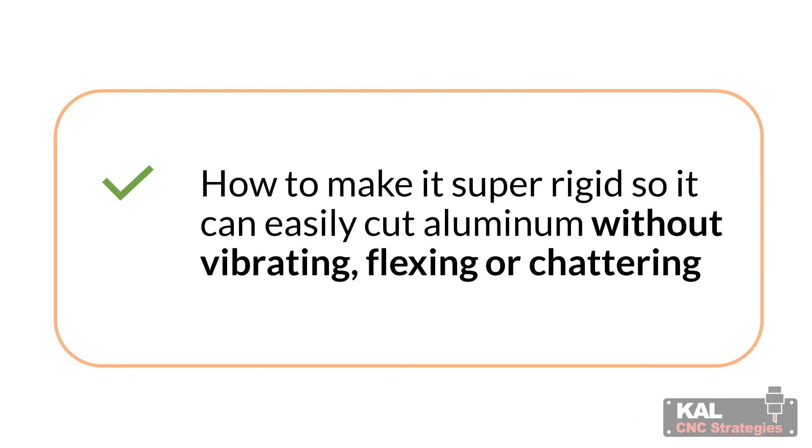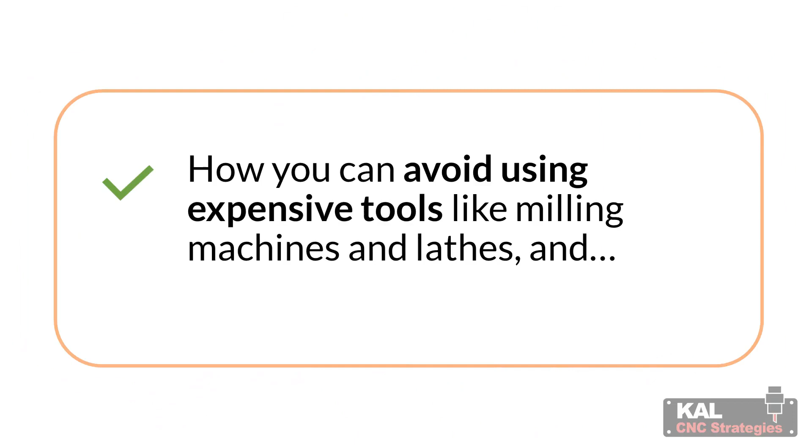In this presentation, you'll discover the simple steps to follow to make your CNC router perform flawlessly, how to make it super rigid so it can easily cut aluminum without vibrating, flexing, or chattering, how to choose the best materials, parts, and components without spending tons of money, how you can avoid using expensive tools like milling machines and lathes, and why it's better to build your own CNC rather than buying cheap pre-built machines or kits.

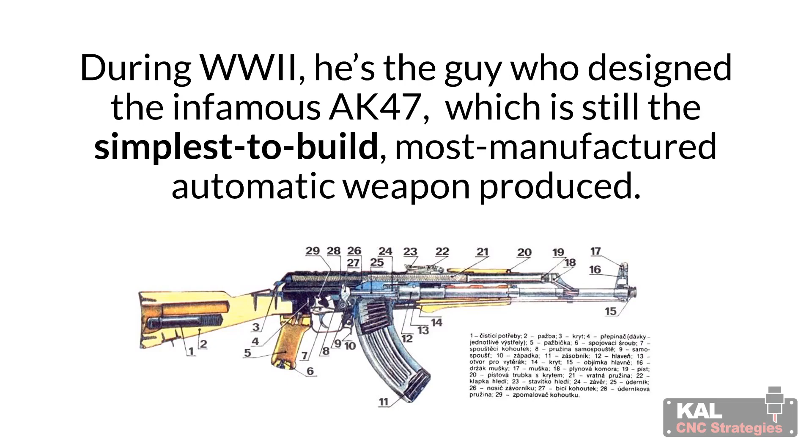Then one day, I stumbled on the perfect strategy. I read about an old Russian weapons designer. His name is Mikhail Kalashnikov. Many of you will know him. During World War II, he's the guy who designed the infamous AK-47, which still is the simplest to build, most manufactured automatic weapon produced. His design was revolutionary.

It had to be super simple to manufacture using unskilled workers and outdated machines that were available to him. Kalashnikov achieved his iconic design by ignoring all the wisdom of the weapons design experts of his day. He saw a problem and solved it without being swayed by what doubters around him thought. It suddenly all clicked to me, and I knew I'd found a way, an approach which would help solve my CNC problem. And so I was inspired to develop the KAL strategy.

The name KAL strategy is a tribute, of course, to what Mikhail Kalashnikov achieved. There's also much more coming up in this presentation to help you with your CNC build, so keep on watching.

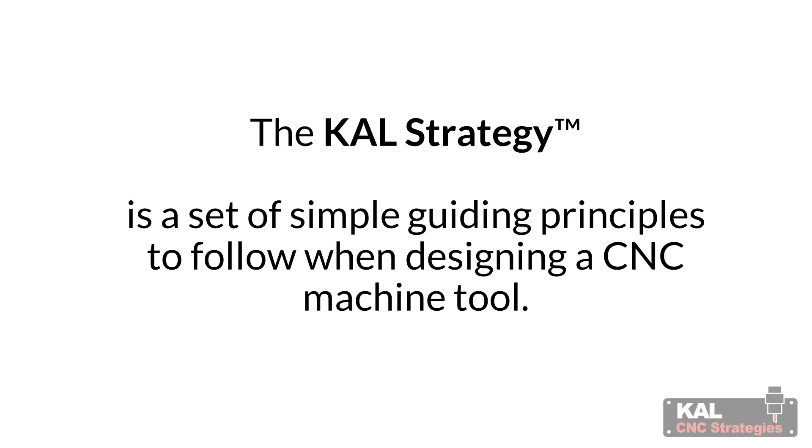The KAL strategy is a set of simple guiding principles to follow when designing a CNC machine tool. The results have been phenomenal because the KAL strategy simplifies the approach to the CNC design and build process a lot. It gives you a clear path to follow. As you can see, I never started out wanting to be an expert at CNC design.

I just wanted to build my own CNC router like many of you out there and make things. But I realized that by following bad advice, I had stupidly thrown away a really good business opportunity. And nothing was going to change for me until I worked out a foolproof, reliable way, a guide that would prevent it all happening again.

You and I have a lot in common as makers and designers. We all face similar day-to-day problems. That is, we just want to get on with producing the things we've designed. The only difference is that I have a simple solution to the CNC design build problem that's insurmountable to so many of us. And that's exactly the reason why you're watching this presentation now.

But first, you're going to need to understand what the real problem with DIY CNCs is. Building your own reliable CNC router doesn't need to be difficult, but it's easy to lose direction. When I started, I had no idea that it could so easily spin out of control and be so difficult to get right. I didn't understand why there were so many badly performing DIY CNC machines existing out there. But now I do. Just look at all the failed machines and horror stories on YouTube and the rest of the internet, and you'll know what I mean.

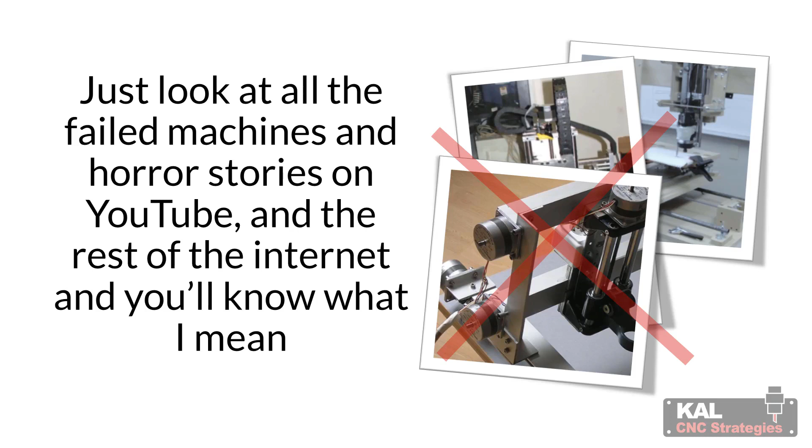You're going to be surprised because the problem is not what you think it is. And I need to make it clear, it's not because you don't have the right building skills. You don't have to be an engineer or a professional machinist to get it done right. The real problem is that we left the tracks.

Let me explain. Back in the 1950s, our factories were changing over from mass-producing weapons for World War II into making consumer goods. The war years were exceptional times. We needed to be really enterprising and efficient just to survive. There was no time to make things overcomplicated and pretty, because lives depended on doing things quickly, simply, and effectively.

But somehow along the way, we started to believe that we couldn't get it done by ourselves. We started to believe all the marketing hype that told us that anything of quality had to be designed by engineers and made in a factory on a production line. All the information you've needed to build a quality CNC on a budget is nowhere to be found. It's not your fault, and here's the reason why.

There are just no in-depth, simple-to-follow, step-by-step guides available that cut through all the BS and the smoke and mirrors. Everybody's trying to sell you overkill, expensive CNC components that you don't really need. They won't tell you that less expensive parts can perform equally well when used correctly. The real trick is to know how to use them properly.

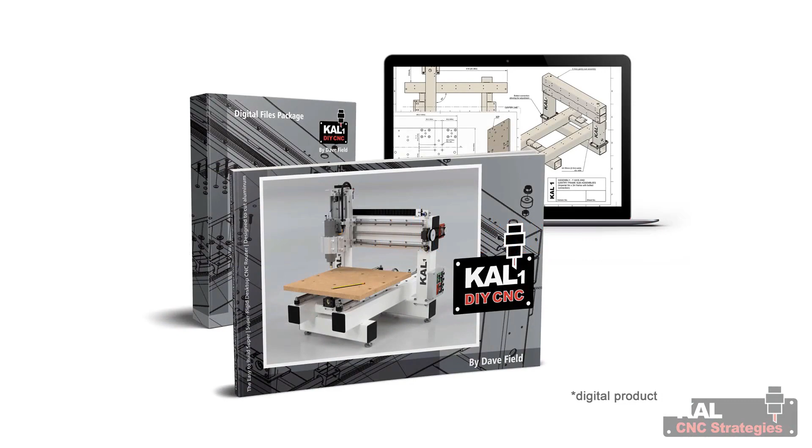Everything I've learned on my long CNC journey has culminated in this easy-to-build professional CNC router design. All the plans and information you'll need to build your own professional quality CNC router are included in the KAL1 CNC package. And here's why the KAL1 CNC router is so unique.

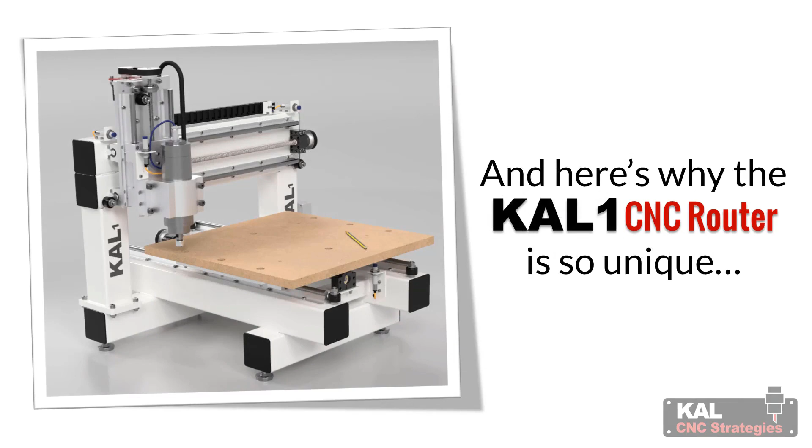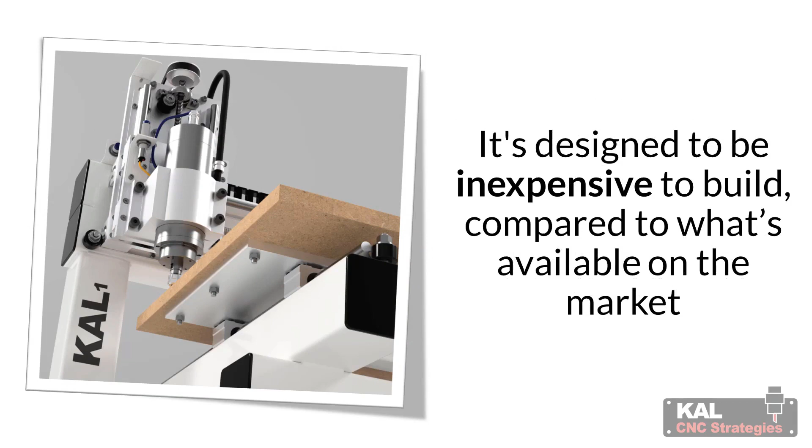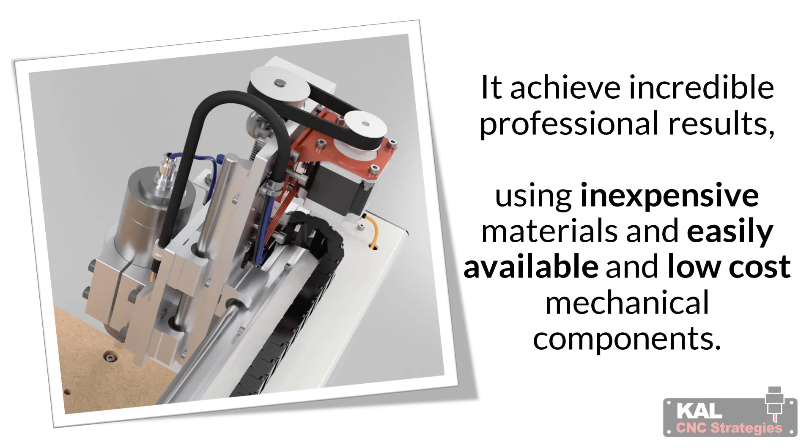It's designed to be super rigid and heavy duty, specifically to cut hard materials like aluminum and brass. It's designed to be inexpensive to build compared to what's available on the market. It incorporates all the economic design principles developed in the KAL strategy. It achieves incredible professional results using inexpensive materials and easily available and low-cost mechanical components.

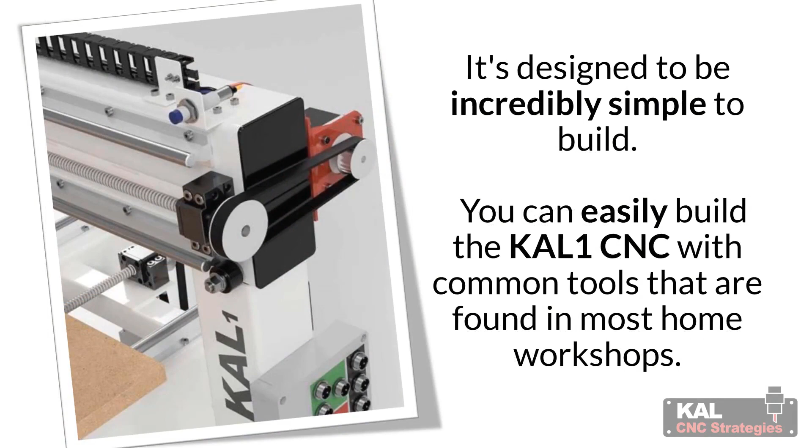It comes as a complete package with plans and in-depth step-by-step instructions. It's complete with all the technical information, drawings, and instructions you'll need to start building your own CNC router. It's designed to be incredibly simple to build. You can easily build the KAL1 CNC with common tools found in most home workshops. No exotic and expensive machine tools like milling machines or lathes are needed.

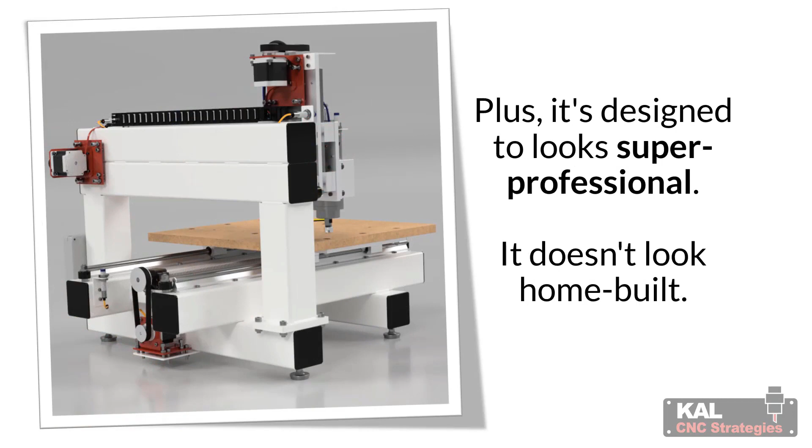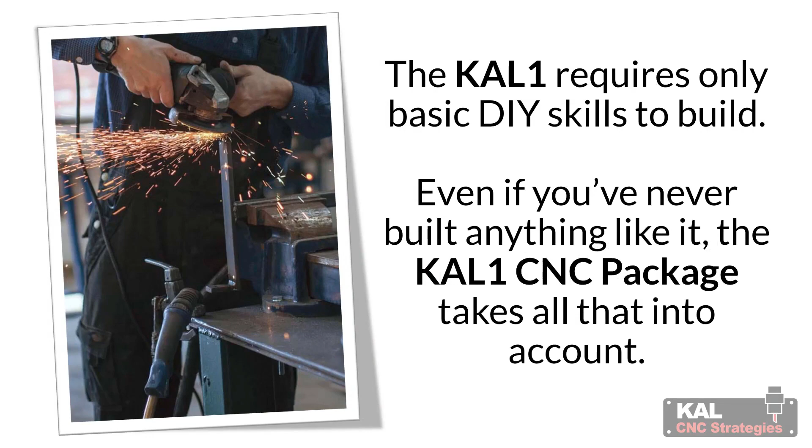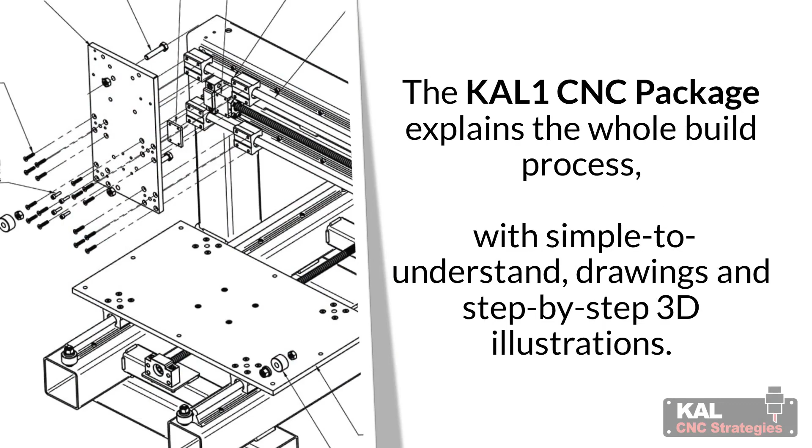Plus, it's designed to look super professional. It doesn't look home-built. The KAL1 requires only basic DIY skills to build. Even if you've never built anything like it, the KAL1 CNC package takes all that into account. It explains the whole build process with simple to understand drawings and step-by-step 3D illustrations. With the easy to follow instructions, you'll be able to build your KAL1 CNC at your own comfortable pace.

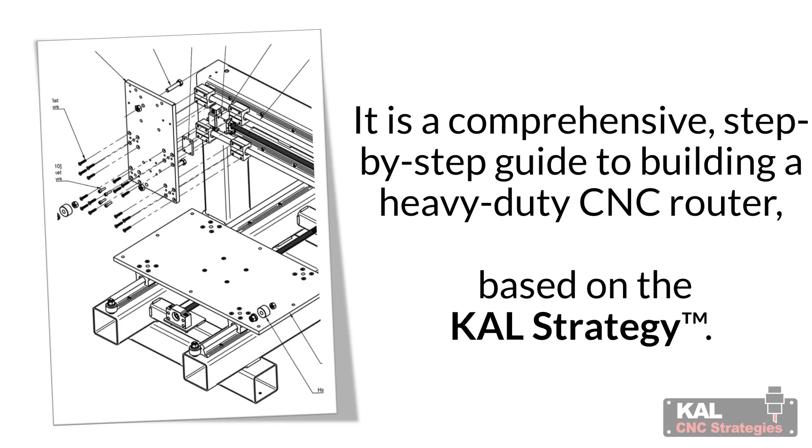But don't get me wrong, the KAL1 is a serious machine tool meant for serious builders, and it'll take dedication and commitment to build. It's been designed for builders and makers who need a professional quality, super rigid CNC router with superior performance. It isn't one of those under-structure thrown together CNC kits. It's a comprehensive step-by-step guide to building a heavy-duty CNC router based on the KAL Strategy.

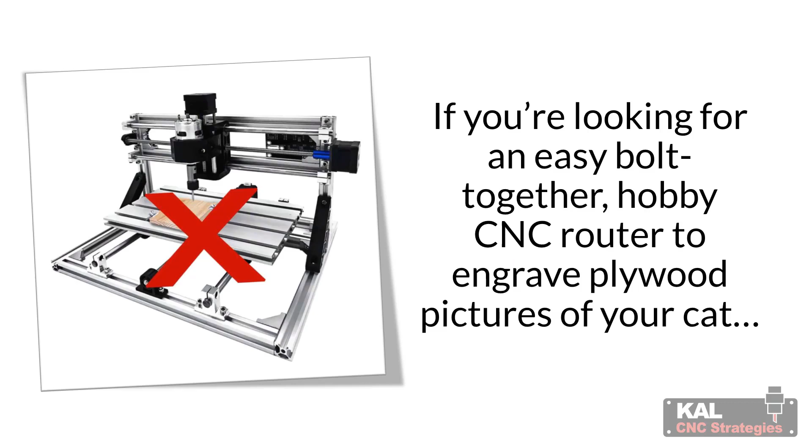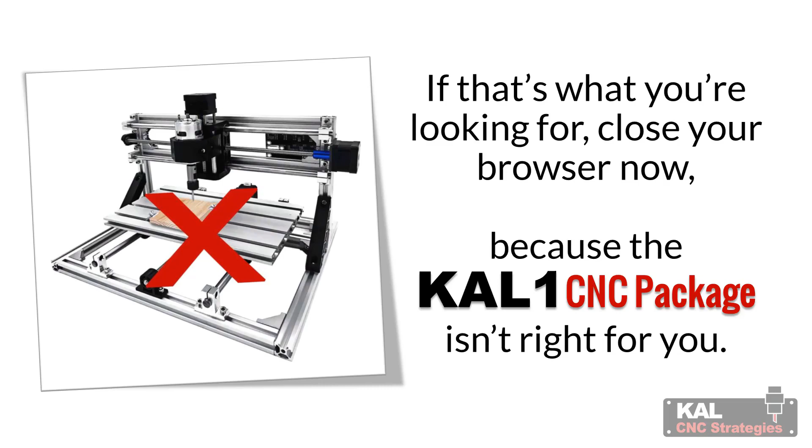So, is the KAL1 CNC package right for you? If you're looking for an easy bolt-together hobby CNC router to engrave plywood pictures of your cat, then KAL1 CNC package is definitely not for you. If that's what you're looking for, close your browser now, because the KAL1 CNC package isn't right for you.

So who is the KAL1 CNC package meant for? It's for those of you who are ready to stop looking for that easy miracle-in-a-box silver bullet solution. It's for those who are ready to put in the real work that's needed to build your own super rigid professional CNC router. It's for those makers who are looking for a serious CNC machine to take their maker skills up a notch.

There are no shortcuts to getting professional quality in a CNC router. There's just no easy push-button solutions. But if you're looking for a pro-quality CNC to serve you well in your shop, and you're prepared to put in the solid work needed to make it happen, then the KAL1 CNC package is as easy as it gets.

Here's what you'll be getting with your KAL1 CNC package. You get the 126-page ebook with 9 in-depth chapters covering the complete KAL1 CNC build from start to finish. It's in easy-to-read PDF format, so you can read it on your computer, tablet, or phone anytime, or print out the drawings whenever you need to.

The ebook contains all the easy-to-follow drawings, instructions, and files you'll need to quickly and successfully complete your KAL1 CNC build. Here's what's inside. Chapter 1, the design build approach. Here we go over all the design choices we made when designing the KAL1 CNC. We go into detail about the different CNC frame configurations. We also explain the different linear motion and drive systems. And we explain the CNC control box and the CNC control software you'll be using.

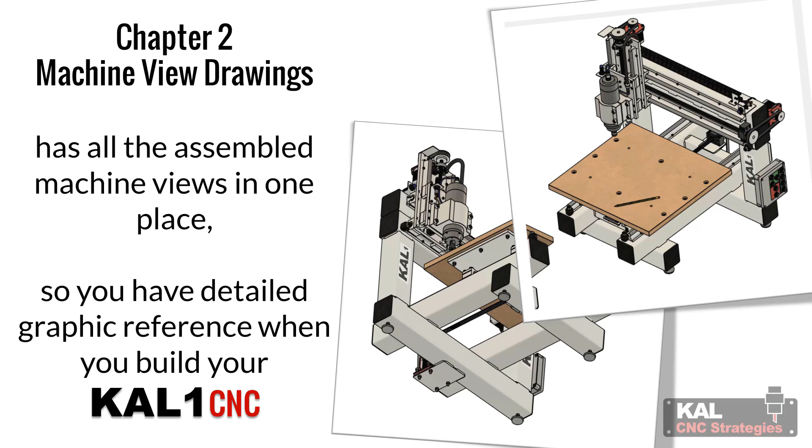Chapter 2, the machine view drawings. It has all the assembled machine views in one place, so you'll have a detailed graphic reference when you build your KAL1 CNC. Chapter 3, the fabrication drawings.

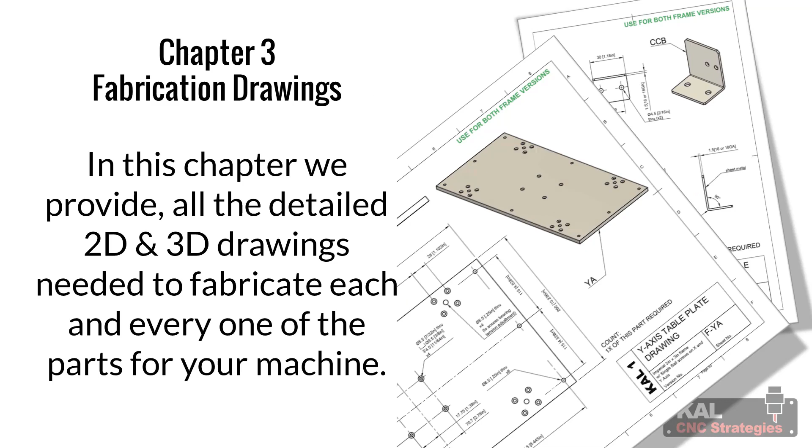In this chapter, we provide all the detailed 2D and 3D drawings you'll need to fabricate each and every one of the parts for your CNC machine. Every dimension, hole, and weld is clearly called out in inches and in millimeters on each of the drawings, together with full, easy-to-follow notes and instructions.

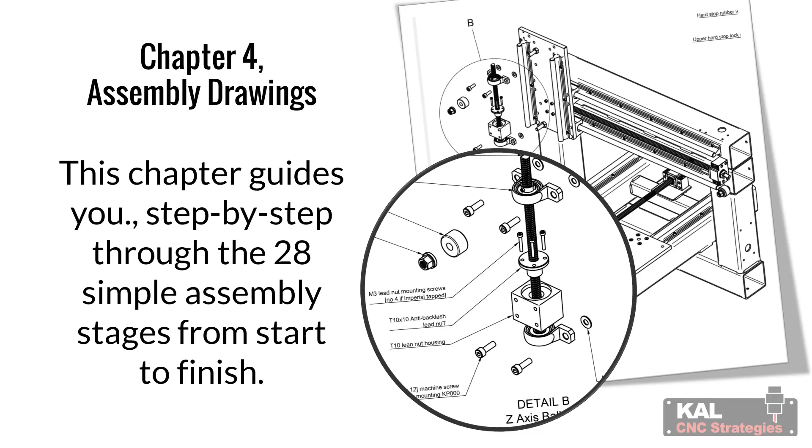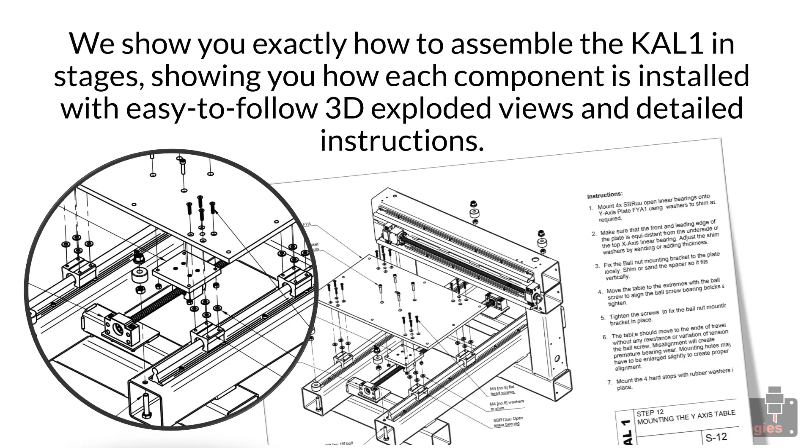Chapter 4, the assembly drawings. This chapter guides you step by step through the 28 simple assembly stages from start to finish. We show you exactly how to assemble the KAL1 in stages, showing you how each component is installed with easy-to-follow 3D exploded views and detailed instructions. You'll be taken through the assembly process in 28 easy-to-follow step-by-step stages.

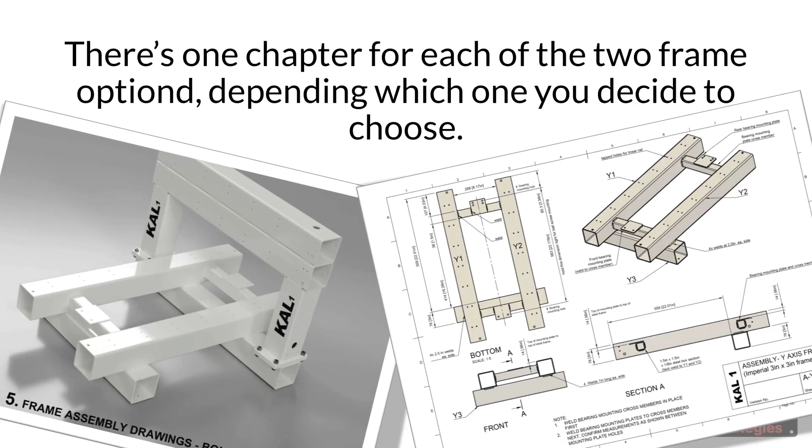Chapter 5 and 6, the frame assembly drawings. You'll need these chapters when building the machine frame. They contain all the drawings to accurately assemble your CNC steel frame. There's one chapter for each of the 2 frame options, depending which one you decide to choose.

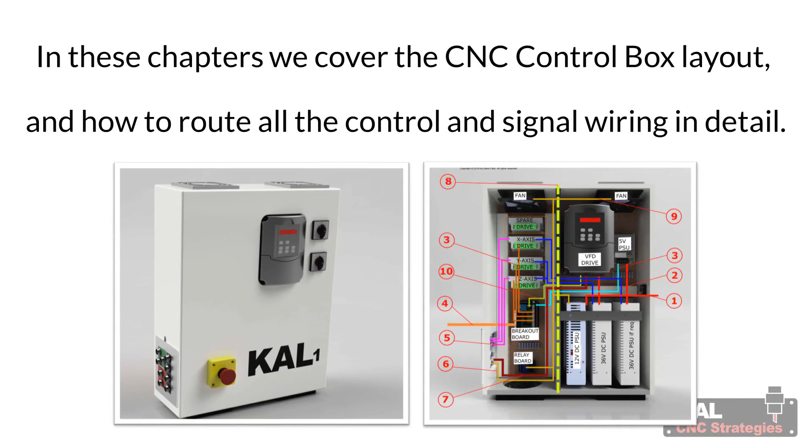Chapter 7 to 9, here we take you through the final build stages of your CNC router. In these chapters, we cover the CNC control box layout and how to route all the controls and signal wiring in detail. Plus, you also get the structural analysis study showing how well the steel frame will perform under the design cutting loads. And you also get the electronic DXF files of all the CNC mounting plates, so you can print full-size cutting and drilling templates.

Or, if you want, cut them on a friend's CNC router. And for that professional final touch, we include the digital graphics files for the official KAL1 logo.

So you can see, with a KAL1 CNC package, you get everything you need to start building your KAL1 CNC router. And you can start just minutes after you purchase the download package. The best part of the KAL1 CNC package is how quickly it is to get started. No design and testing needed. And the KAL1 CNC router is really simple to build. No machining or anything like that.

Right now, you're probably curious how much the KAL1 CNC package is. You may be thinking that this package could cost you over $500. Well, the good news is that's not the case.

I'm going to reveal that to you in just a few moments. But first, consider this. When you buy the KAL1 CNC package today, you'll be avoiding all those weeks and months of wasted time researching, drawing up, and testing your own CNC design, wondering if it'll work as you expected. With the package, you'll be able to get started on your CNC build without any delays. There'll be absolutely no unknowns, and the path ahead for your CNC build will be clearly mapped out with no curveballs or surprises, because all the engineering heavy lifting has already been done for you. You'll be able to proceed through your CNC build with complete confidence.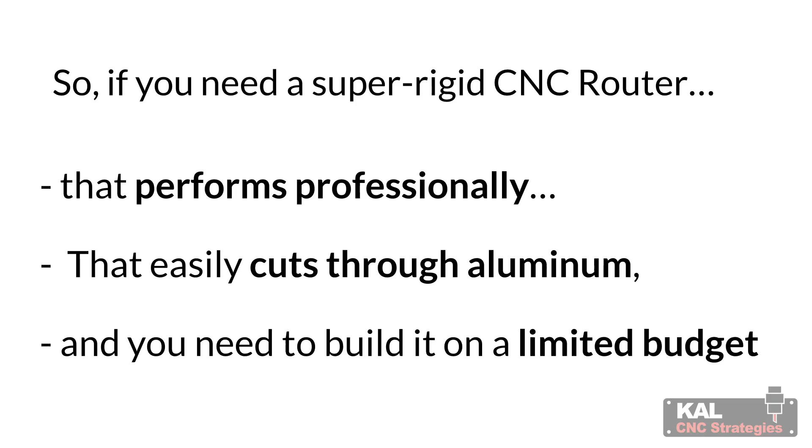So if you need a rigid CNC router that performs professionally, that easily cuts through aluminum, and you need to build it on a limited budget, and you want complete step-by-step drawings and instructions in a completely professionally designed package, then the KAL1 CNC package is right for you.

When I first started putting together this package, I was thinking that a fair retail price is $297. But I've changed my mind now, and I'll tell you about it in just a moment.

But first, at some point, you're going to discover that to complete your CNC router build, you're going to need to have an accurate and complete bill of materials, or BOM, as it's known. In the BOM, you'll need to compile a complete list of all the parts with quantities. There's really no way around it, because you'll be completely lost without one.

Now, the good news is that you won't have to do all that work. That's because I'll be giving you, as a free bonus, the complete detailed BOM we've put together for the KAL1. The BOM lists all the materials, parts, and components you'll need with the quantities, purchase links, and pricing. You'll be able to order the products online by simply clicking or pasting the part number into your browser. The KAL1 BOM is really valuable and is worth at least $50. It'll end up saving you days and days of work. Including the BOM as a bonus brings the total value of the KAL1 CNC package to $347.

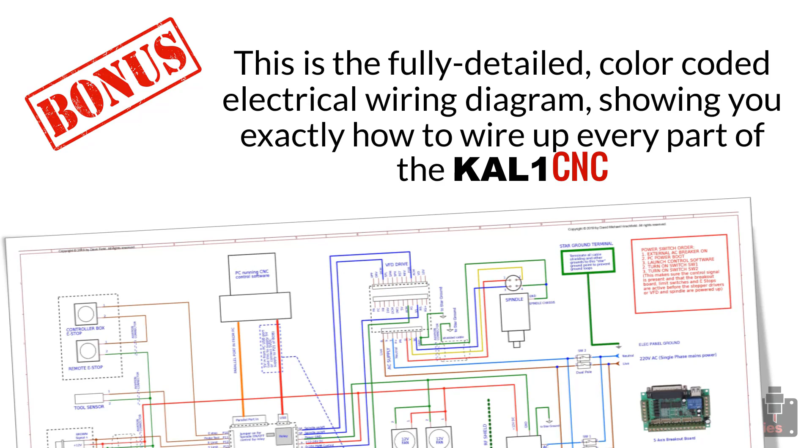When you purchase the package, I'm including the complete KAL1 CNC wiring diagram free as a bonus. This is the fully detailed, color-coded electrical wiring diagram showing you exactly how to wire up every part of the KAL1 CNC. It explains exactly how to wire the limit switches, the stepper motors, the spindle control, and all the internal wiring of the CNC control box, which is the computer control brain of the CNC router. You won't find this wiring diagram anywhere, not on the internet or in any library.

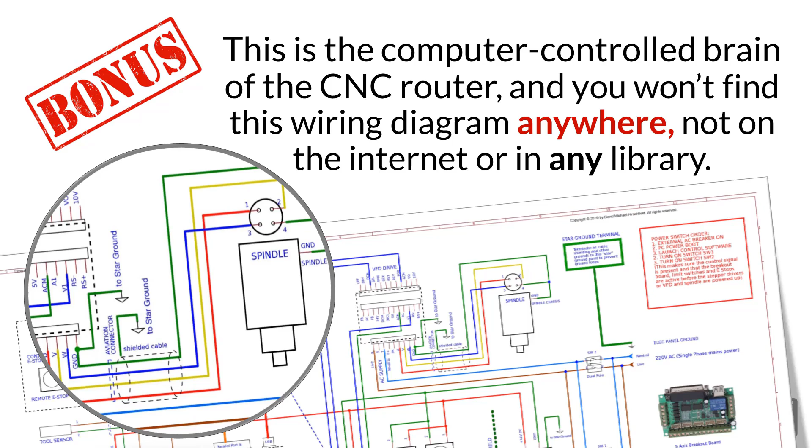The KAL1 CNC wiring diagram took me weeks of design, trial and error, and testing to get right. It makes the wiring stage so straightforward that I could easily sell it for $50 as a standalone product, but instead I'm including it in your package today as a completely free bonus. It'll eliminate all your wiring guesswork and testing headaches and allow you to speed through the final stages of getting your CNC machine cutting.

With the complete KAL1 CNC package plus bonuses, you'll be in easy reach of having your own super rigid, pro quality CNC router. You'll be joining the thousands of makers and builders who are succeeding using CNC routers in their shops every day to produce incredible products. They're producing things like drones, robotic parts, electric guitars, auto and bike parts, signage, and thousands of other things. With your CNC router, you'll be able to easily go from rough concept sketches to accurately machined aluminum and brass parts in just minutes.

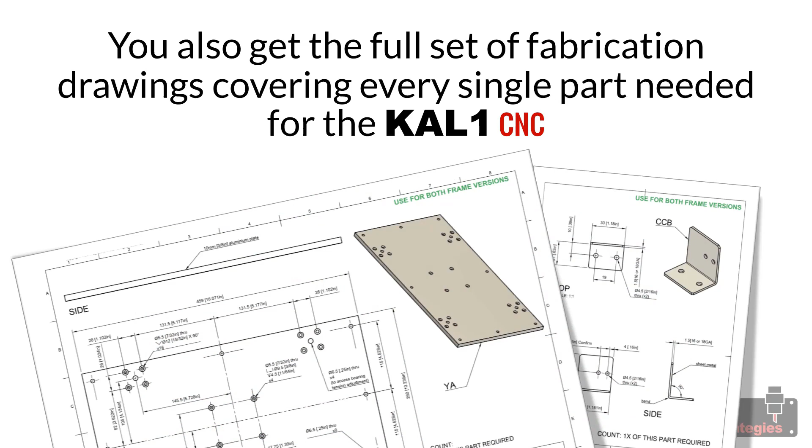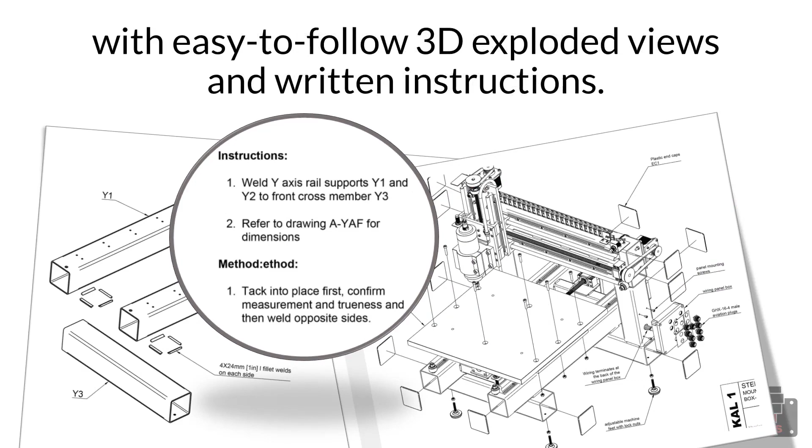So here's what you'll be receiving today. You'll get the complete KAL1 CNC package, which includes all the chapters we covered earlier. You get the detailed KAL1 BOM, listing all the materials, parts, fasteners, and electric parts you'll need, plus a spreadsheet file of the BOM so you can revise it if you want. You also get the full set of fabrication drawings covering every single part needed for the KAL1 CNC, plus all the step-by-step assembly drawings with easy-to-follow 3D exploded views and written instructions. And then there's instructions on how to hide the wiring in the frame, so you end up with a really professional-looking machine without a tangle of wires.

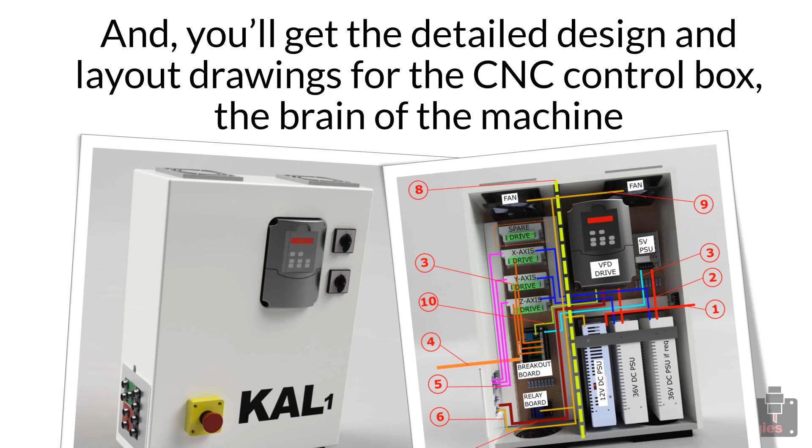You'll get the detailed design and layout drawings for the CNC control box, the brain of the machine. We show you in detail how to lay out the power supplies, control boards, and how to manage the wiring so everything is stable and you avoid any electrical interference in the signal wiring. Plus, included as a bonus is the complete KAL1 CNC wiring diagram, so there's no wiring guesswork at all. It shows you exactly how to wire and ground every electric and electronic component correctly and avoid any problematic ground loop problems. Also, you get the digital CAD files for all the mounting plates, so you can print out full-scale drilling templates, or even cut and drill those parts on the CNC router if you choose.

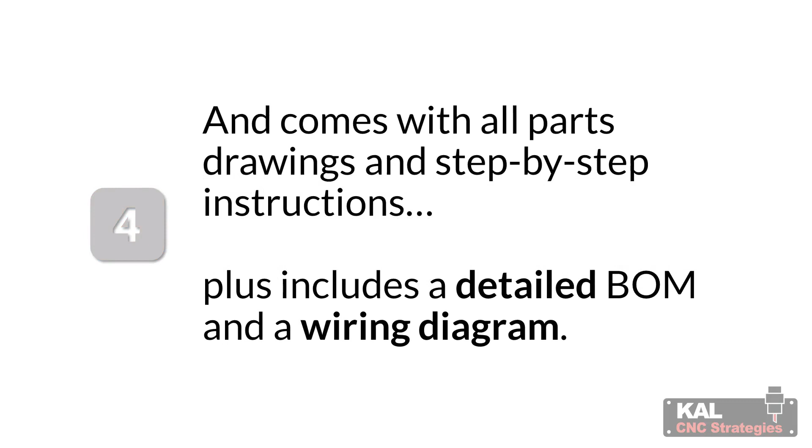Three, the KAL1 CNC is professionally designed and is super easy and low cost to build, only requiring simple tools. And four, your time is money, and it makes complete sense to build from a design package that is complete and comes with all the parts drawings and step-by-step instructions, plus a detailed BOM and a wiring diagram. Five, you'll be able to finish your CNC build much quicker, and start making parts sooner. You won't need to waste time designing, rebuilding, and testing your own CNC designs.

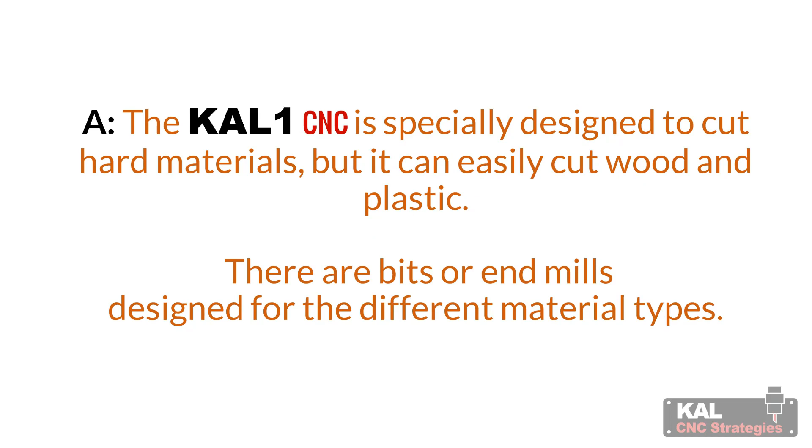Can I easily cut soft material like wood and plastic on the KAL1 CNC? The KAL1 CNC is specially designed to cut hard materials, but it can easily cut wood and plastic. There are bits and end mills designed for the different material types.

You said that the KAL1 is a better option than other types of CNC routers. Yes, I've surveyed what's available in the market at the time of publication. Kit CNCs of a similar size and capacity sell for up to 3 to 4 times what the KAL1 CNC costs to build, and factory-built machines will cost upwards from 3 to 5 times. Everything points towards the KAL1 CNC package being your best available option.